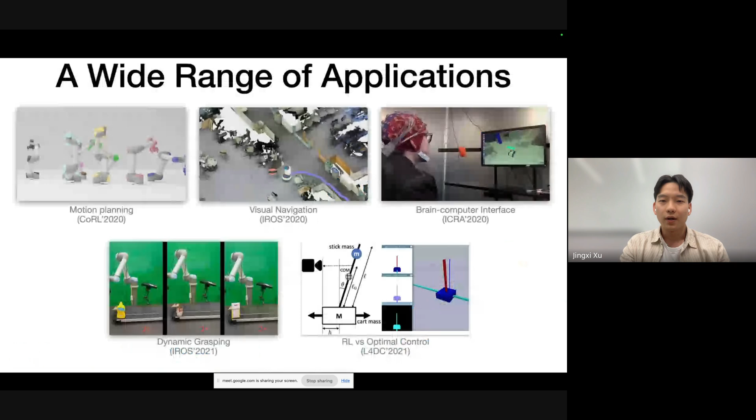Today's talk, I want to talk about some of my previous work in robot learning, specifically how to address the sparsity and scarcity issue in robotic data. So I want to start with some of my own experience, what my own journey is entering robotics.

So when I first came to Columbia, I didn't know that I wanted to work in robotics. So I worked with different groups on pure learning and pure vision problems. And then I started collaborating extensively with Professor Peter Allen on a wide range of different applications. So I worked on motion planning, visual navigation. I also worked from dynamic grasping to RL versus control.

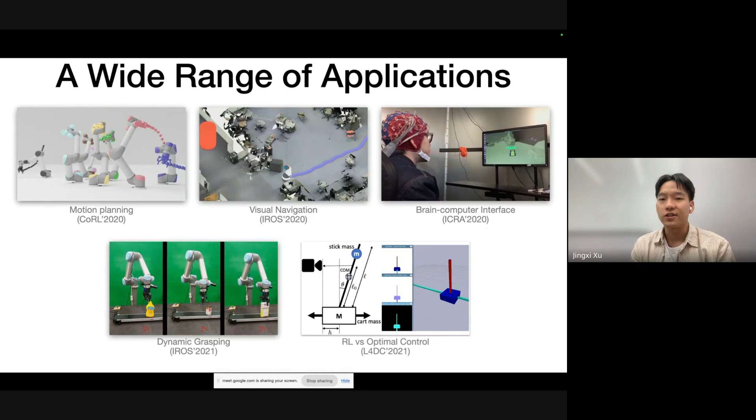And then I realized, I think one of the key challenges which makes robotics so unique, so different from vision and language, is the challenge of data, which is the lack of data we have in robotic applications, which I think most of you guys will agree with me.

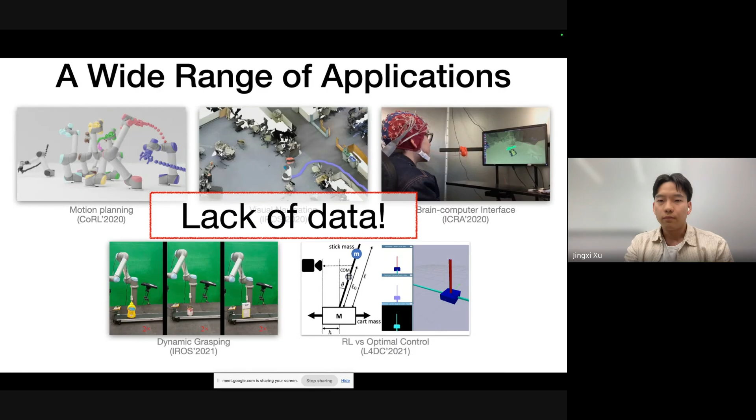And that's why we have amazing applications such as ChatGPT, DALL-E. And when you move to robotics, things become trickier. So in robotics, oftentimes we need specialized or customized hardware to do the job. And this hardware requires specialized knowledge or expert domain knowledge to operate, meaning that it's really hard to collect data at large scale with this device.

But luckily, sometimes we have simulators, and I'm a huge believer in simulation. And if we formulate our problem smart enough, and then it becomes simulatable, then we can actually enable large-scale training inside simulators.

However, for some applications in robotics, simulation is very hard. For example, to simulate raw tactile signals or to simulate granular media, it's very tricky to have good simulation for these applications. So it's slightly trickier to do data collection.

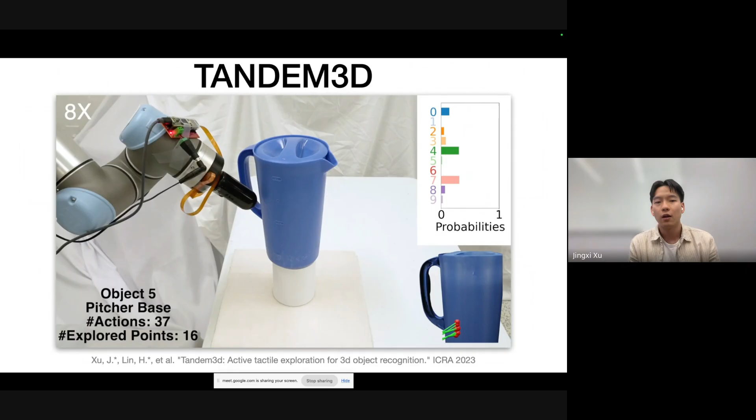This is inspired by humans' capability of using tactile sensing, because we humans are experts at using tactile sensing. We can put our hands into our pockets and retrieve a particular object without looking into the pocket, such as a coin. Now we want to ask: if a robot is equipped with a tactile sensor, can it do the same? So we are trying to identify a particular object with as few actions as possible. Not only do we want to identify the target object, but we also want to do this very efficiently. That's the goal of this project.

Before I go into the setup of this particular project, I want to take a quick detour and talk about the tactile finger we used in the tactile projects I'm going to talk about today. This is the DISCO finger, developed in our lab. It has light emitters and receivers on the skeleton. When you touch the gel, you change how the light transmits inside it, and consequently change the light received at the receivers.

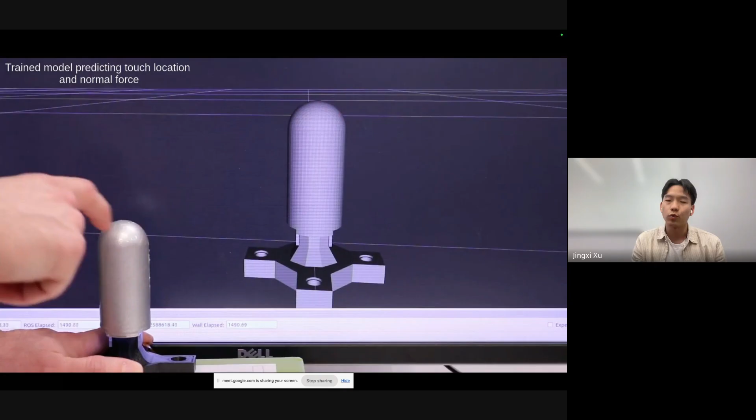There are 30 pairs of light emitters and receivers, giving us around 900-dimensional raw tactile signals. This is a visual of how the signals look when you touch somewhere on the finger. Then we can train a machine learning model that can regress from these 900-dimensional signals into contact locations, contact normals, and contact force. This regressed information is what feeds the policies we'll talk about today.

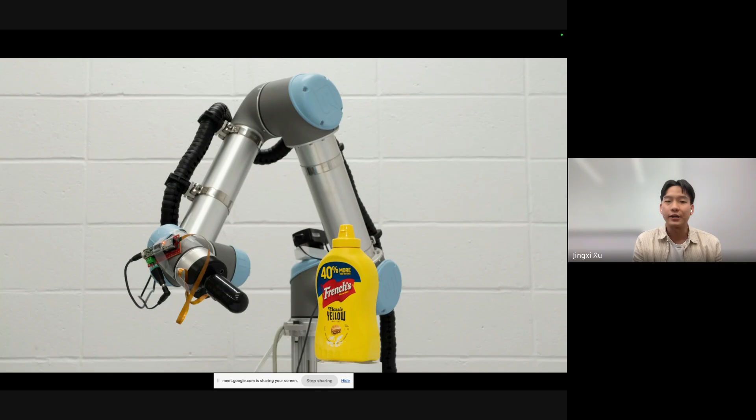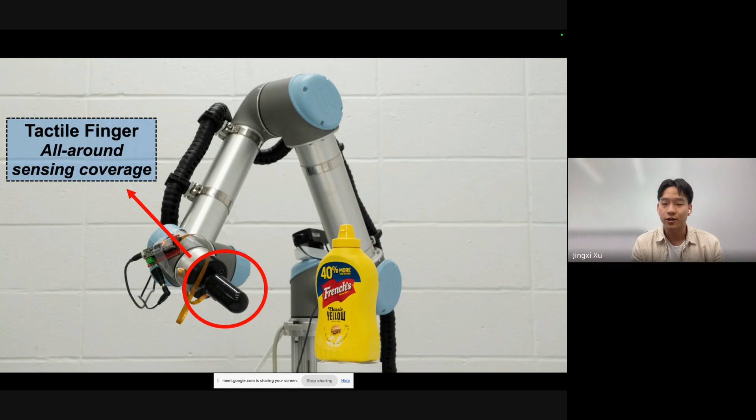Going back from this detour to this particular project: we mount this tactile finger on the UR5. A key advantage of this tactile finger is that it has all-around sensing coverage, so it can sense touch from all directions. We place the target object, which is unknown and in a random position and rotation, in the workspace. Then the robot drives the tactile finger, poking the target objects, collecting a sequence of contact locations and normals—this sparse information—and tries to identify the object out of 10 YCB objects.

So the red dot is the touch point, and the green is the normal. Correct? Yes, yes.

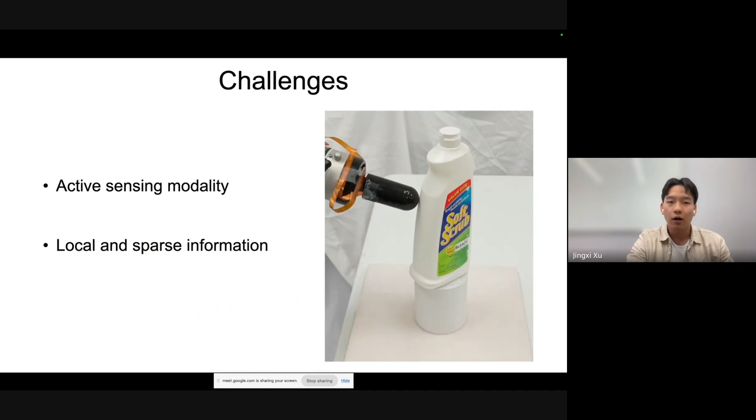So how did we achieve this? Again, the challenges are that tactile sensors are active sensing modalities, and they only give you very local and sparse information. So in order to approach this challenge, we...

We formulated the problem as a model-free RL problem so that we can learn an efficient exploration policy to judiciously choose the next action. In our formulation, we design a 6-DOF action space. At each time step, the robot can choose from X, Y, Z, roll, pitch, yaw, to either increase or decrease for a small step. This gives us 12 discrete actions.

And then we identify 3 key components for this task. The first is the encoder, which encodes the sparse information into a 3D representation. The discriminator will look at this representation and predict the identity of the object. And finally, the explorer will look at this representation and guide the exploration, outputting the next action to move.

Specifically, as the fingers contact the target object, it collects a sequence of contact locations and normals. We first rearrange them into a point cloud, and then this point cloud is passed through two PointNet++ architectures to generate the 3D representation. We choose PointNet++ because it's permutation invariant, and it can also handle different lengths of points.

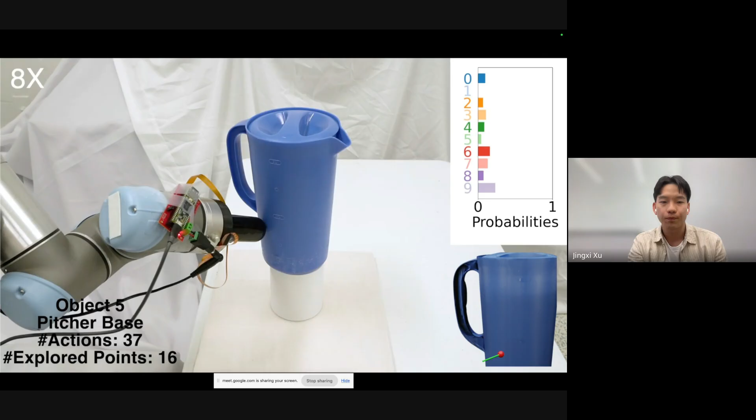The object is placed in an unknown position, and then the finger will visualize the predicted distribution over the 10 objects. We'll also visualize the point cloud representation. The finger collects a sequence of sparse information, and it gradually moves to the most discriminative area of this object. For this object, it's the pitcher handle.

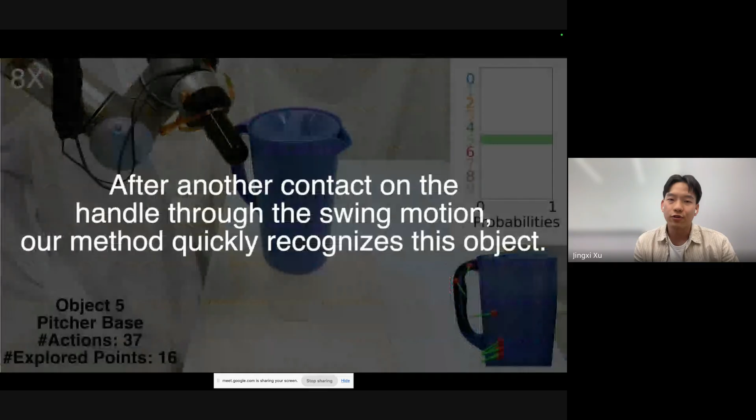Through a small swing motion, it gets a very discriminative point on the handle of the pitcher, utilizing the full sensing coverage of the sensor. After finding another discriminative point on the handle, it quickly converges to the ground truth identity of this object. This time it takes 37 actions.

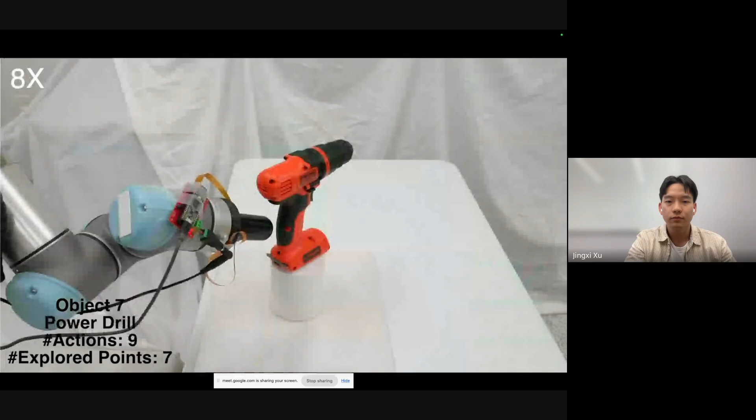And this is another example on the power drill. This time it gets a very discriminative point from beneath the drill, and then it quickly converges to the ground truth identity. And this time it takes 9 actions.

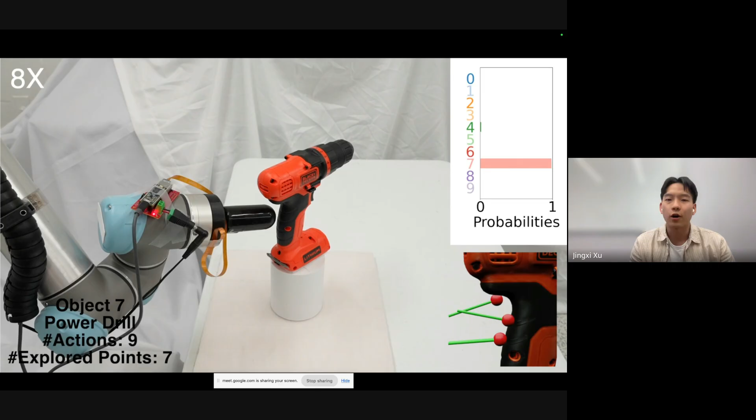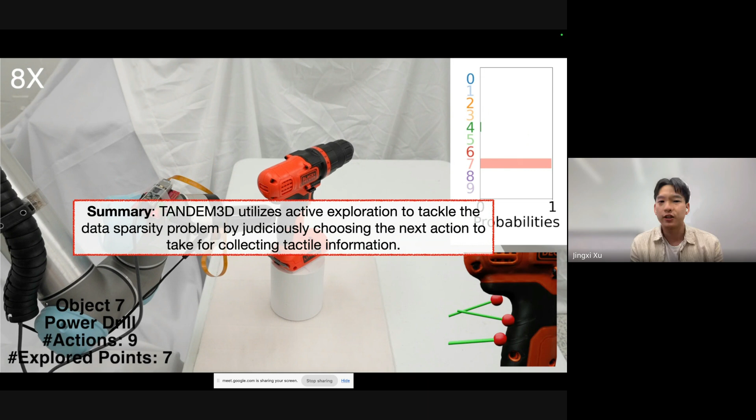So to summarize this part: yes, we have the data sparsity issue in tactile sensing, but Tandem 3D utilizes active exploration to tackle the problem by judiciously choosing the next action to take to collect the most useful tactile information.

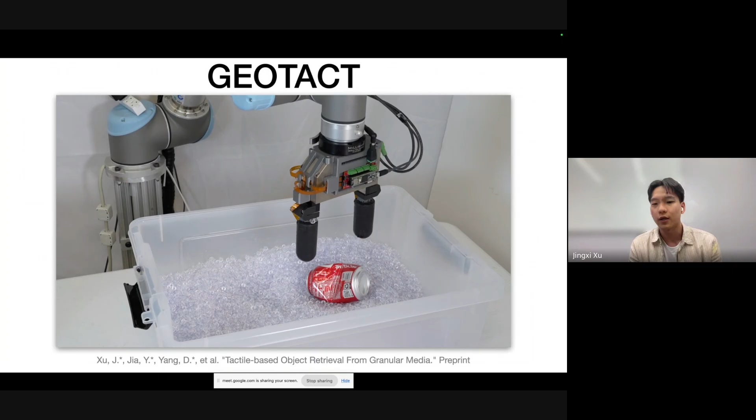So that's the Tandem 3D work. Now we want to move to a more challenging environment where vision is basically out of the question. This work is what we call GeoTact. In this work, we're trying to retrieve objects buried completely inside granular media with only tactile sensing.

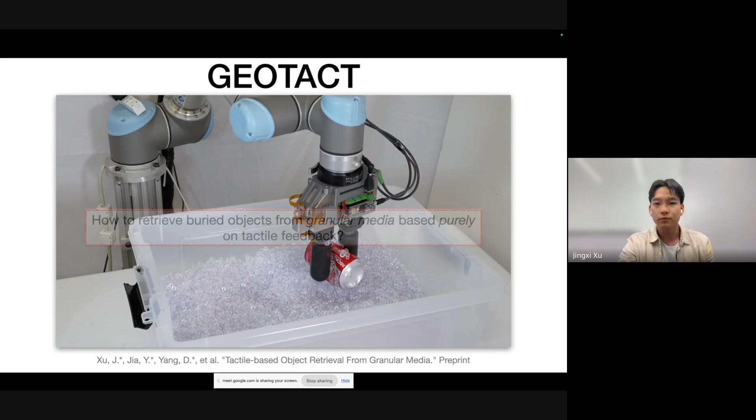Again, we still have the challenges of local and sparse information of tactile signals, but also, because of granular media, in such a sensor-deprived environment, we also have extra large uncertainty and sensing noise.

In addition, this environment also requires certain properties of the hardware. A lot of the vision-based, camera-based tactile sensors, the pioneer work, even though they have very high resolution, have a boxy form factor, which will induce high drag when they move inside granular media.

Also, the tactile sensing they give doesn't cover the edges and corners. But in granular media, you really need full sensing coverage. So there are some specific hardware requirements on the sensor we use.

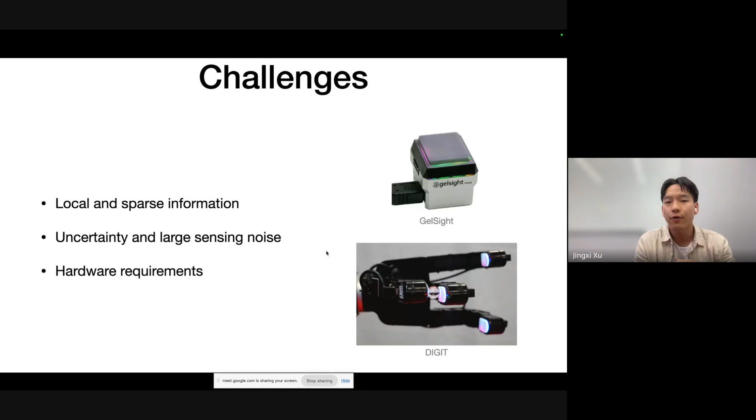We borrowed the idea of pushing from a lot of previous work. Many previous works show that pushing is a very efficient technique to reduce uncertainty and increase grasping robustness. But most of them show this technique on tabletop or open air environments. In this work, we basically argue that pushing is an efficient technique also in granular media. It reduces uncertainty, increases robustness, and it's also a great technique to funnel the object to a graspable pose.

However, designing a heuristic-based pushing behavior isn't trivial. So again, we formulate the problem as model-free RL and utilize simulation for large-scale training. And we hope that the pushing behavior can emerge by itself through the design of the action space.

So our action space is a 4-dimensional vector, where the first 3 elements are the discrete change in x, y, and theta direction, since our finger moves in a 2D plane. And then the last element indicates whether the exploration should be terminated and the finger should close and grasp the target object.

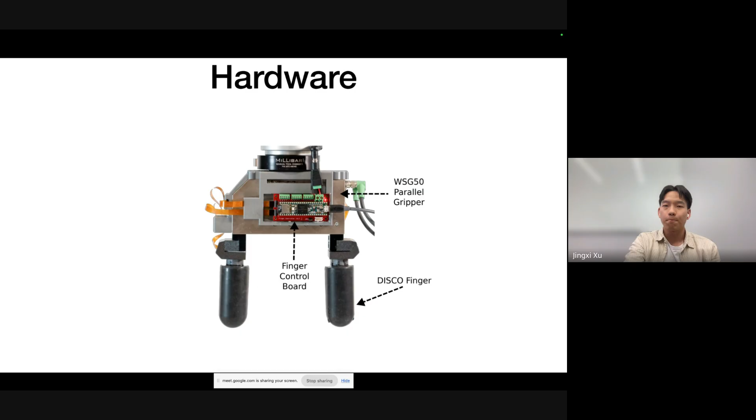Finally, this is our hardware. We mount the DISCO fingers on the parallel gripper. Again, the full sensing coverage of the DISCO finger works really well with the granular media environment, and the cylindrical shape also reduces drag inside the granular media. I want to show some of the policies in action.

Well, in this demo, we'll visualize the contact location and also the contact force. So this is where we bury the chocolate box.

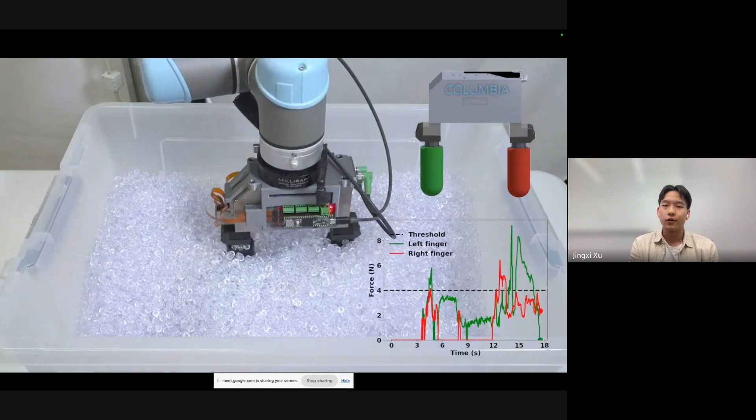Our policy initially detects a fake pushing contact, even though it hasn't really contacted the target object. So it starts to react to this fake contact until a true contact happens, and then it starts to correct its own behavior. Through a series of interactions, it correctly forms a grasp and retrieves the target object.

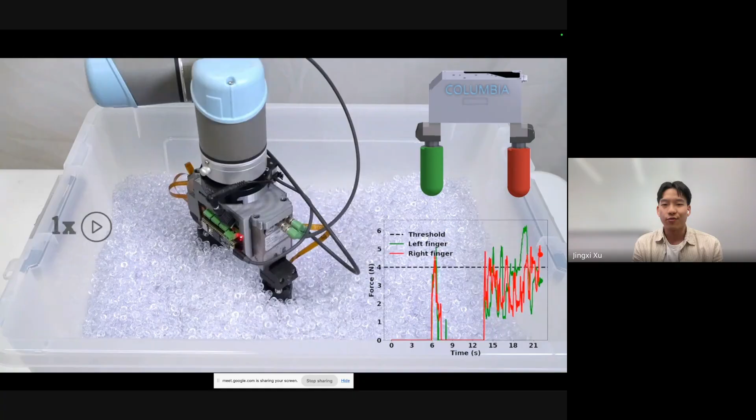So this is another example on the screwdriver. The screwdriver is actually a very hard object to grasp - it's very long and very thin. However, the policy, through a series of pushing interactions, forms a good grasp and successfully retrieves the screwdriver.

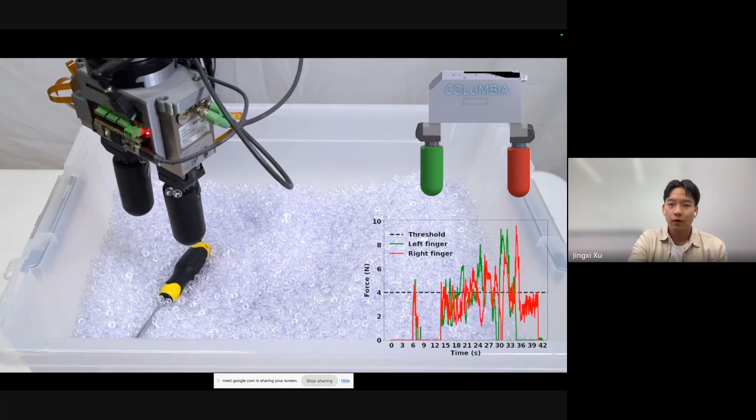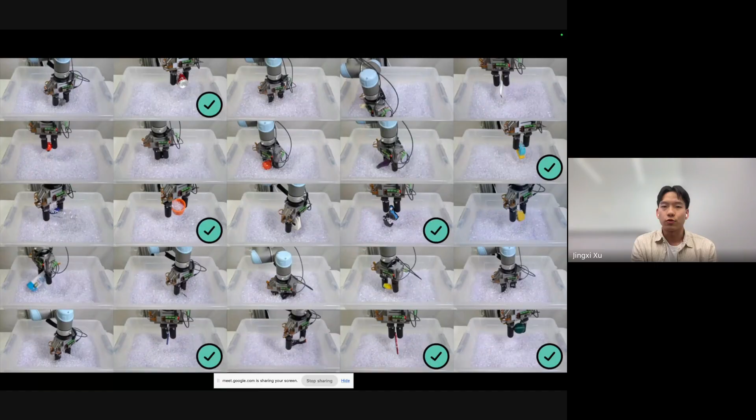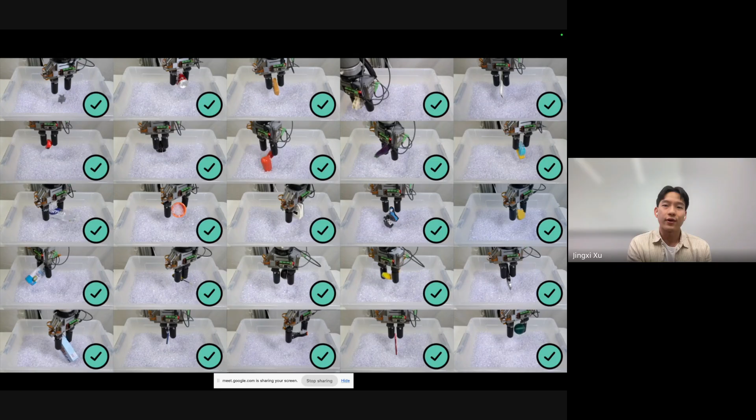When we train the policy in simulation, it's only trained on 7 objects with primitive shapes. However, the policy actually works on a larger range of objects. So these are some random objects we chose from our lab, and we just threw them into the granular media, and then we asked the policy to retrieve them. The policy is able to generalize to these objects within 3 attempts, though sometimes it does use up all 3 attempts to successfully grasp these objects.

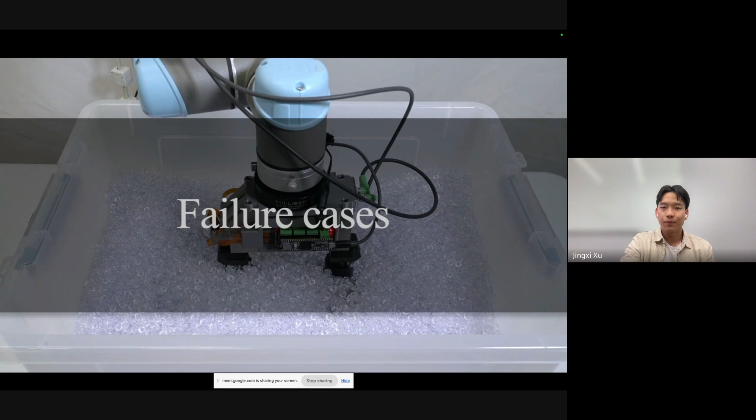It's always fun to look at failure cases. One of the most common failure cases is when there's a thin layer of granular media getting stuck between the target object and the finger. Because of the very low friction of the beads and the 3D printed object, it often slides off.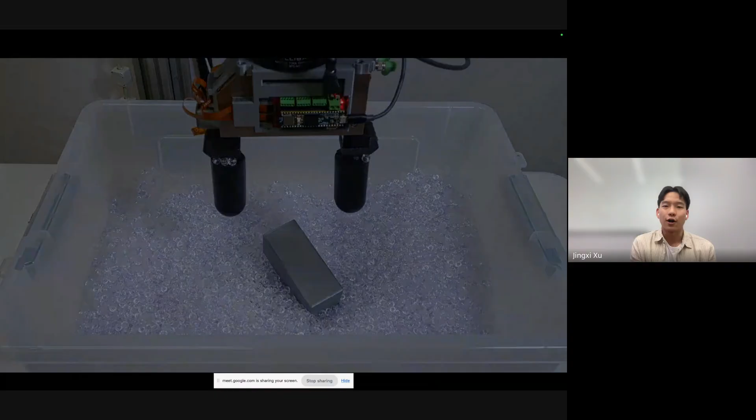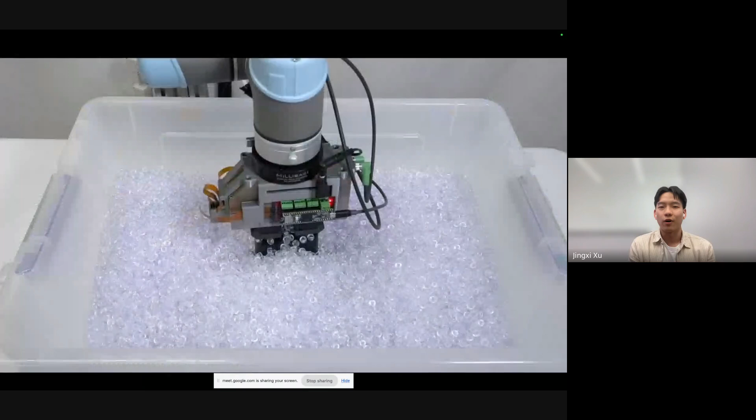Another very common failure case is when we are trying to grasp cylindrical or ball-shaped objects. Because our finger is also cylindrical, imagine two cylinders trying to grasp a ball - it's very hard, and the ball is oftentimes squeezed outside the finger. So we believe this is a limitation of parallel grippers, and if we have multi-fingered grippers, this will be less of a problem.

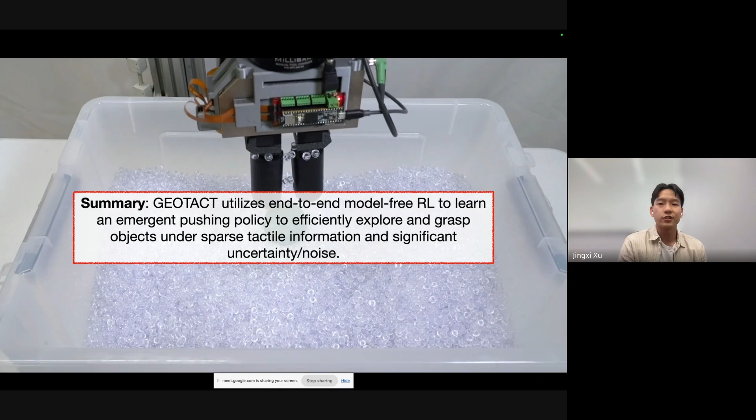So to summarize this part, GeoTact utilizes model-free RL in simulation to learn an emergent pushing behavior to efficiently explore and grasp target objects under sparse tactile information.

Nice, so we covered my line of work in tactile manipulation. Now I want to switch gears. Feel free to ask questions if you have any. Now I want to switch gears to rehab robots.

I want to talk about how we handle the data scarcity issue in rehab robots. So while data sparsity in tactile manipulation focuses on the quantity of the data, now we want to switch to the quality of data.

During my PhD, I collaborated with Columbia Medical School and mechanical engineers. Our lab developed a wearable device to help stroke subjects open their hand. And we have to train machine learning models that predict their intent such that the wearable device can provide appropriate assistance.

In this line of work, we explore different paradigms ranging from semi-supervised learning to meta learning to generative AI. We go from only being able to handle intra-session drift to also being able to handle inter-session drift, and I'll explain the difference between these two terms later in the talk. We also go from only being able to use low capacity classifiers to finally being able to use high capacity classifiers.

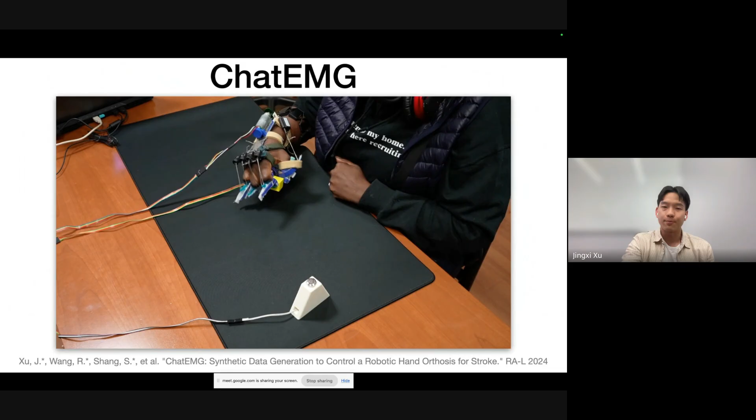The work I want to focus on in this domain is ChatEMG, but I'll also touch on the two projects before ChatEMG in this talk. Again, the goal is to train intent inferral classifiers with very minimal data collection, because it's really hard to collect data from people with disabilities.

Before I go into details, I want to share some background about this domain. So 800,000 people have a stroke a year in the US, and a majority of them will experience impairments. Less than half of them will recover full function. A lot of tasks that we as healthy subjects take for granted are impossible for stroke subjects - this is a stroke subject attempting to pick and place this wooden block, which is very hard, nearly impossible.

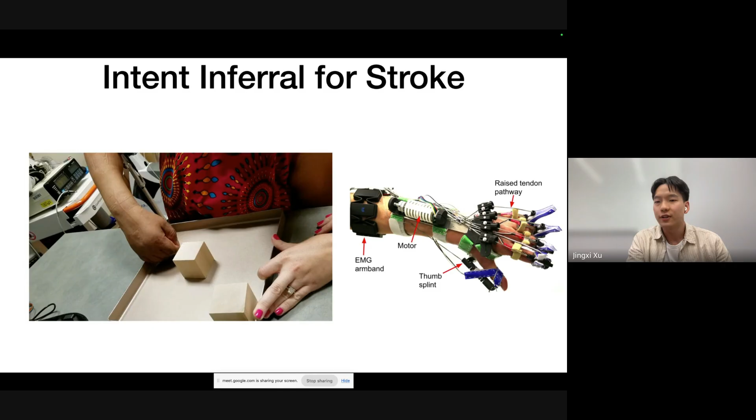So our lab developed this wearable device on the right. It's a motor-driven exoskeleton - it has a motor, it is a tendon-driven device, and it also has an EMG armband. EMG is short for electromyography - you can think of it as measuring your muscle intensity or muscle activities.

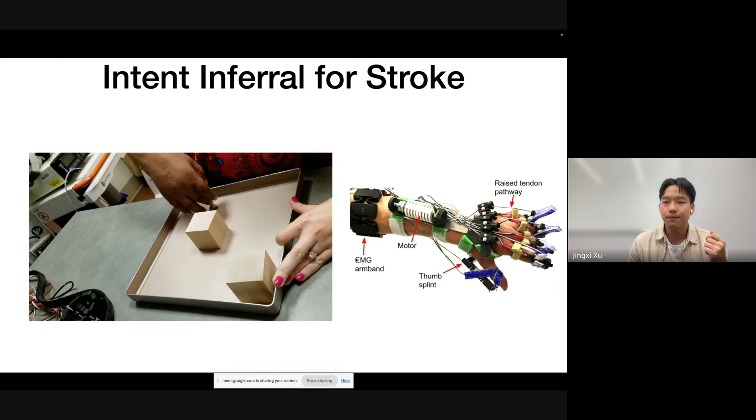The goal of the machine learning job is to develop models that can predict the user's intent from the sensor reading. If the model thinks they want to open their hand, it drives the tendon and extends their fingers. If the model thinks they want to close their hand, it releases the tendon and the patient can use their own strength to close their hand.

The population we study in this line of work have lost their ability to open their hand, but they still have residual motion to close their hands, which is a very common stroke after-effect.

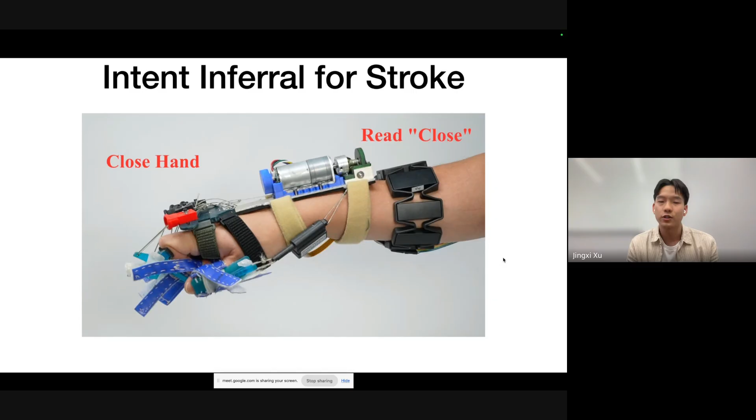This is the armband we use. It has 8 electrodes surrounding the forearm, producing 8-channel EMG signals at 100 Hz. This is a demonstration on healthy subjects. For stroke patients, the change in the EMG signals is much more subtle, which is why it's much more challenging for stroke subjects.

We already know it's really challenging to collect data on people with disabilities. What makes it even more challenging is there are huge variations or drift in EMG patterns across conditions, sessions, and subjects. So what do I mean by these different terms?

A session is a single use of the device between donning and doffing. Basically, a patient joins our session, comes to the hospital, we put on the device, we do our experiments, and they take off the device—that's a single session.

It's easy to understand because different subjects, due to different neuromuscular impairments, demonstrate very different EMG patterns. But even for the same subject, if they come in on different days for different sessions, there's a huge drift in EMG signals within sessions and across sessions.

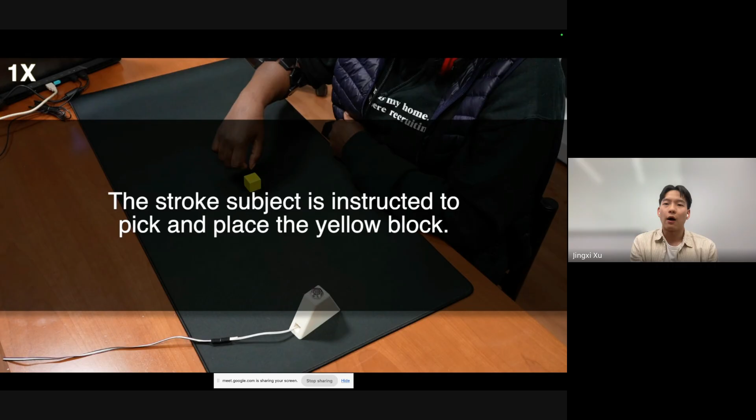So finally, we take the whole pipeline of data generation and limited data collection into a real clinical environment. In this demonstration, we are showing onboarding a new subject, so the data from this subject is never seen by ChatEMG before. And then we asked her to perform pick and place, because without any assistance it's impossible, which makes a lot of sense.

Now we started data collection. The way we do data collection is we'll give out verbal cues to the subject. We'll say open, relax, or close, and then we'll record the 8-channel EMG signals simultaneously. So you can see now we say open, and because she couldn't open her hands, you barely see any change in the EMG signals for the open intent.

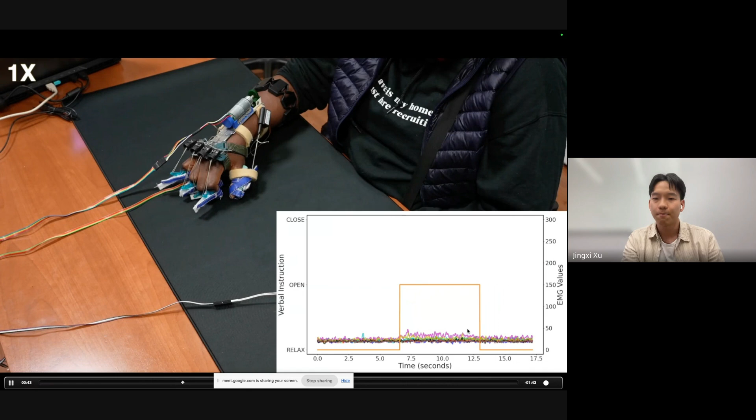Now we say, please close your hands, and you see that she can close her hands and there are huge EMG changes. And finally, we say, please relax your hand. And that's the only data we collect—that's one round of open, relax, and close data.

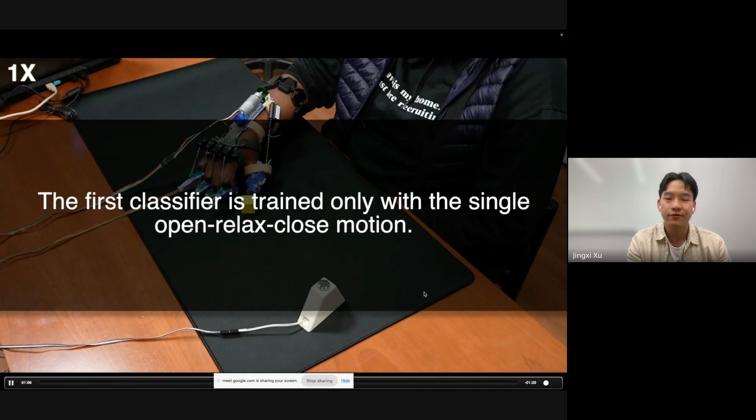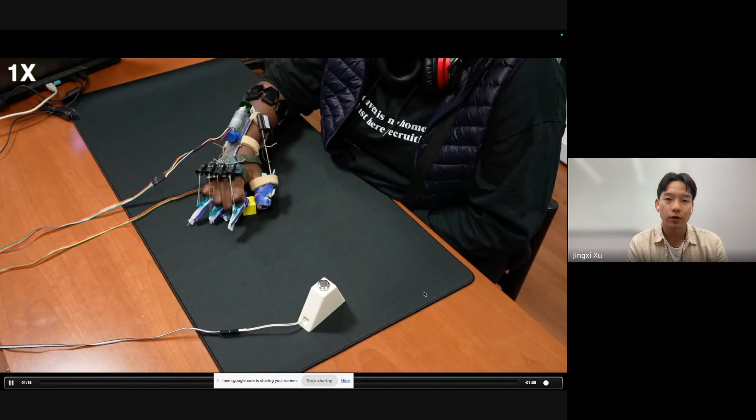The first demonstration we show is on the classifier trained only with this limited data set. Because the data is so limited, the classifier never correctly predicts the open intent, and the patient couldn't use the device to perform pick and place, which is very understandable because the data is just so limited.

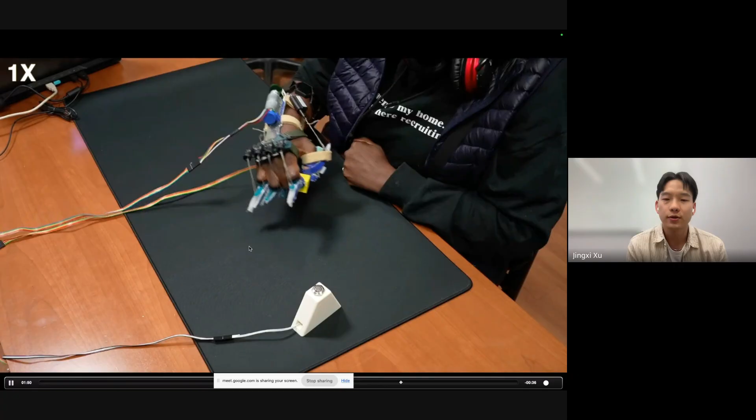Now, this is the data we collected before. With ChatEMG, what we can do is we can sample prompts from this very limited data set, and we ask ChatEMG to complete the prompts. Now the second classifier is trained with this synthetic data plus the original data, and now you can see the device can successfully open, and the patient can use the device to perform multiple rounds of pick and place motion.

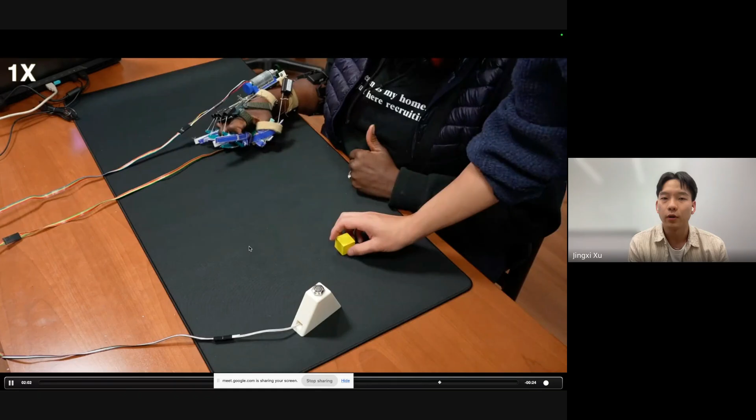It's not perfect, but it does work much better compared to the previous model that did not use synthetic data at all. And to the best of our knowledge, this is the first time a model trained partially on synthetic data is deployed on a real stroke subject in a real hospital environment.

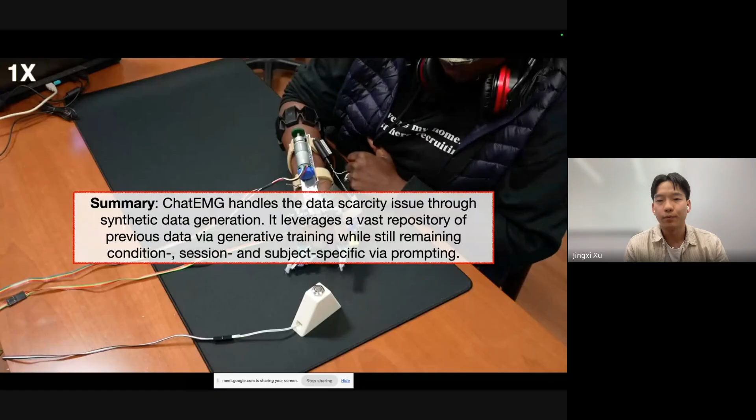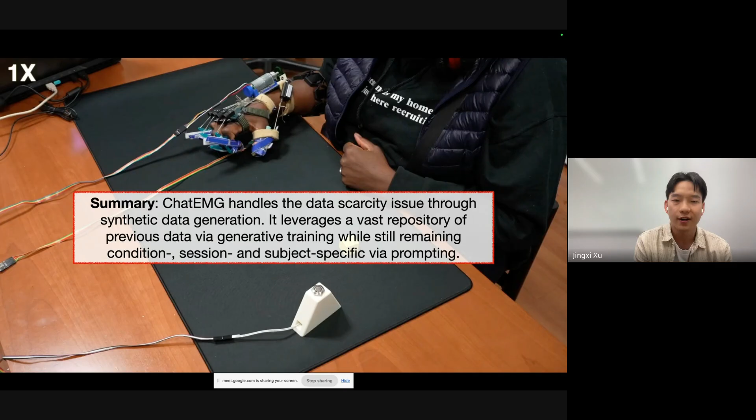To summarize this part, in order to handle the extreme data scarcity issue, we use synthetic data generation. ChatEMG leverages a vast repository of previous data through generative training, but it also remains context-specific via prompting.

To summarize what we talked about today, we talked about how we handle data sparsity and data scarcity in two different domains. We learned that even though we have data sparsity issues in tactile signals, we can utilize simulation, and we can utilize

RL to learn an efficient exploration policy to judiciously choose the next action to explore and manipulate the target object. For rehab robots, we learned that not only can we try to make it work with minimum data by utilizing semi-supervised learning or meta learning, we can also dream up our own synthetic data through generative AI. The hope is that the lessons we learn from these two domains are also applicable to other domains because the data problems are so fundamental in robotics.

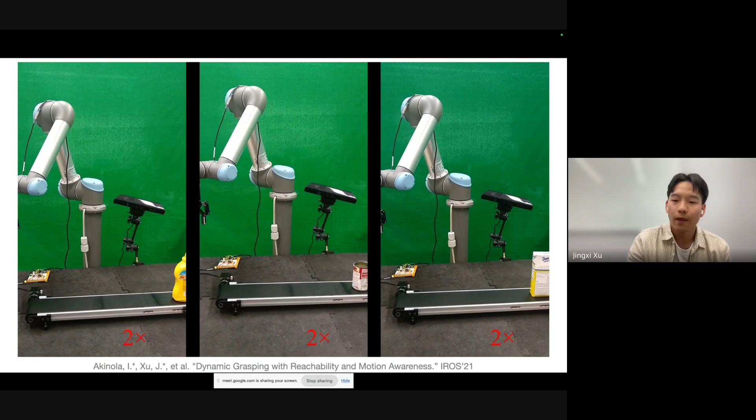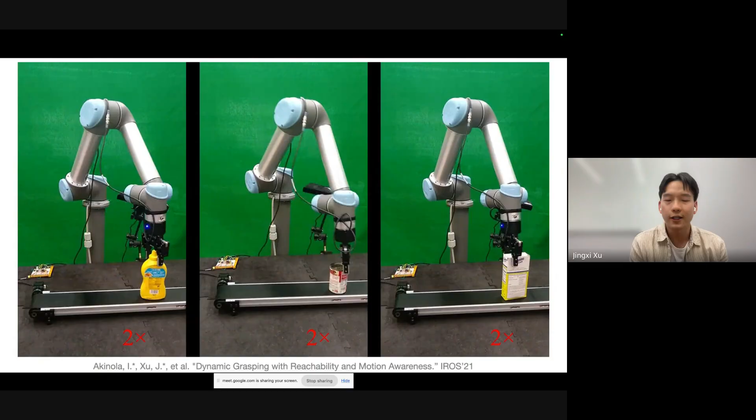Finally, in maybe the last 4-5 minutes, I want to talk about what I want to work on in the future. I want to work on robotic applications that have real impact on people's everyday life under real life constraints. I think the data problem is one major real life constraint we have.

I'm always interested in seeing robots, my algorithms or models deployed on real hardware, preferably in unstructured environments. I think one of my main future focuses will still be robotic manipulation. I believe robotic manipulation is the pearl of robotics, one of the most prized and challenging domains in robotics.

I think in order for us to achieve the goal of general robots that can do dexterous manipulation, loco-manipulation, as humans can do, we need to do work on multiple fronts. One of the fronts, I think, is we need really scalable data collection pipelines for multimodal data collection.

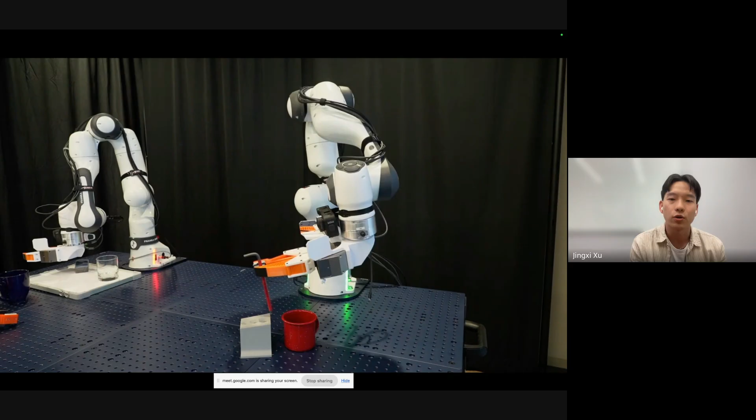When I say scalable data collection pipeline, I don't necessarily mean handheld data collection. I think teleoperation is also a viable, interesting choice, and both have their pros and cons. Another front: I'm a huge believer in simulation, and I believe simulation and synthetic data is key to really addressing the data problem in robotics. I think right now we still have a lot of challenges simulating, for example, raw tactile signals or deformable objects. If we can really simulate raw tactile signals, I think that can enable a wide range of dexterous behavior.

Another thing is multimodal foundation models. I believe utilizing internet data by utilizing large pre-trained models on language or videos will be very important to achieve generalist robots. To the best of my knowledge, I don't think right now we are at the point where we truly utilize the common sense or the physics learned by large language models. Most of the time, we are still using language as an indicator of which task to perform. So I think there will be a lot of opportunities to work on this domain.

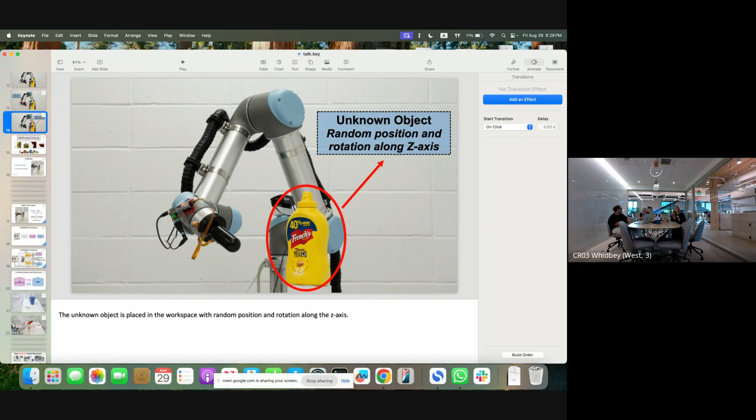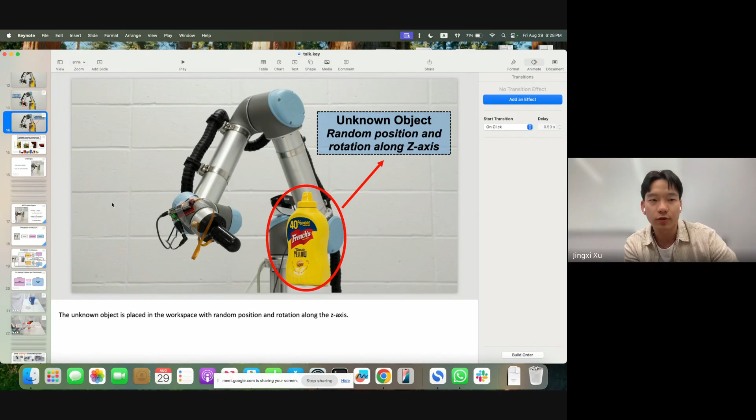Yes, that's true if the location is the same for both. But this is not true for this case, because the location is actually randomized. Even the location of this white pedestal on which the object is placed is not randomized. That is not randomized, because it's connected to the board, but the object, because it's using Velcro to attach to the cylinder, its location can vary, and the orientation can also vary.

So technically, it can only occupy half of the cylinder. But inside our training simulation, there's no cylinder stand, and the object can basically move freely inside the workspace, as long as you can get a first contact. So you cannot put it away such that the robot moves along the diagonal of the workspace and couldn't get a contact - then that's an invalid episode. But we do randomize the location. During testing, we have to attach this thing to the workspace, so it's limited testing.

Could you imagine having a network that takes as input also object models? Right now I guess your network is trained on this specific set of objects, right? But making it so that you say, okay, here are 5 object models - which of those is it?

Yes, so that's an interesting point. I would argue that our model is model-based, because during training we are basically keep loading this object in our RL training, so we are actually using the model. But I agree, if we want to extend this pipeline to not just instance level identification but class level identification, we do need somehow to input more information to the policy, because right now we only have a limited number of objects.

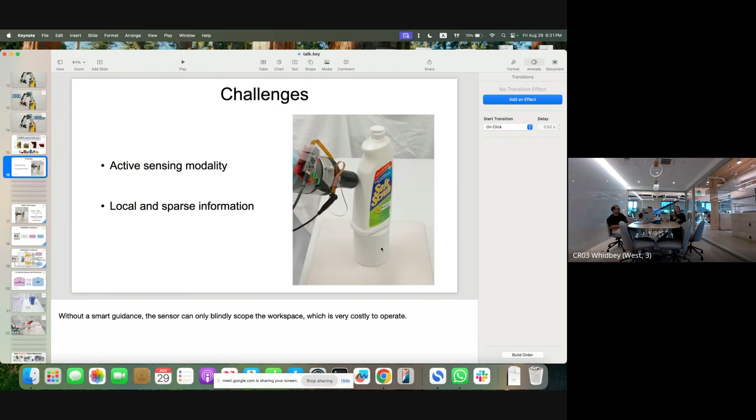Yeah, that makes sense. I had another question about this work, actually. I was wondering about the strict necessity of the classifier module, because if the Explorer module has enough information to do efficient exploration, shouldn't it also have enough to do discrimination?

That's a very good question. This is actually one of our baselines - we just give everything to the Explorer, so the Explorer has to lead the exploration, but also has to determine when to stop the exploration and what is the identity of the target object. So it takes much longer to train because it's not as efficient as separating, having a separate discriminator model that we train specifically with a labeled dataset. So yes, that's a good point, but it doesn't work as well as separating these two components.

Okay, thank you. Is there some connection you could make to actor-critic kind of models in reinforcement learning in general? Yeah, I think the idea of this is actually somehow from the actor critic setup, it's similar in concept.